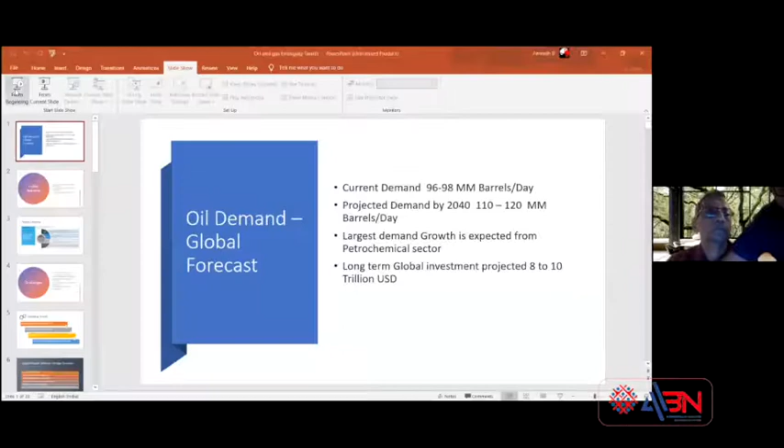Thank you very much for AABN for giving me this opportunity to share a few thoughts about the challenges faced by the oil and gas industry, how it is emerging, and what potential role it is going to open up for engineering, procurement services, construction, and operational and maintenance services, particularly for Indian entrepreneurs and business. I also thank people who have taken time from their busy schedule to be present in this event, to listen to some of my thoughts.

I also feel very humbled by the presence of people like Mr. Navneet, Mr. Nagarajan, who are all my senior colleagues, and we work together. I also feel this topic will be of great importance, not only to entrepreneurs, but also to our learned academic faculties of our university, who are shaping up our future engineers. However hard we try to do business, the sustainability depends on the chain of talent that is going to come from the university.

Having said that, many of my oil and gas colleagues who are present here, maybe some of the points I talk about may already be known to them, or in fact, they are more knowledgeable than what I am in that field. But this is purely my perception of how this industry is going to emerge.

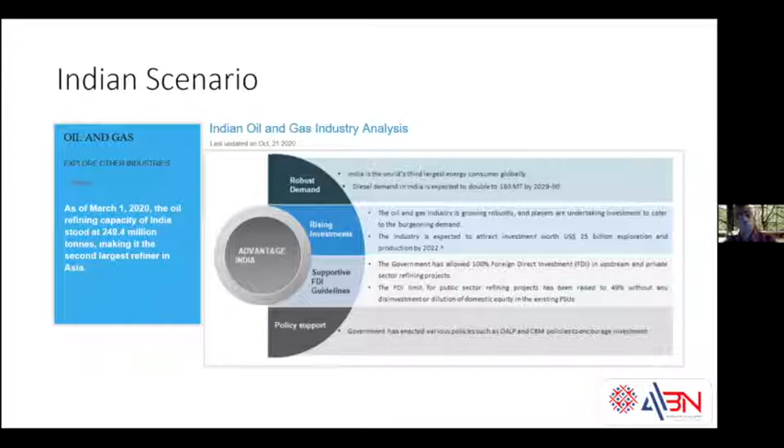Having said this, what are all the challenges faced by this oil and gas industry on the ground level? As Gopi has set the context, this reduced oil price is going to stay for long. Probably it may not even reach more than $100 per barrel again.

With this reduced oil price scenario, pressure on margins in the industry is increasing, forcing companies to optimize their expenditure and cost by way of operation, refurbishment, or new capital investment, whatever we call it. There is a huge pressure on margin and ways and means to make this operation more profitable.

On the other hand, environmental laws and compliances are becoming very stringent and more visible to the public. This involves not only a compliance issue but also a reputation issue. If a major accident occurs in an oil and gas facility, it not only involves financial losses, but also reputational losses, and the consequences are very huge.

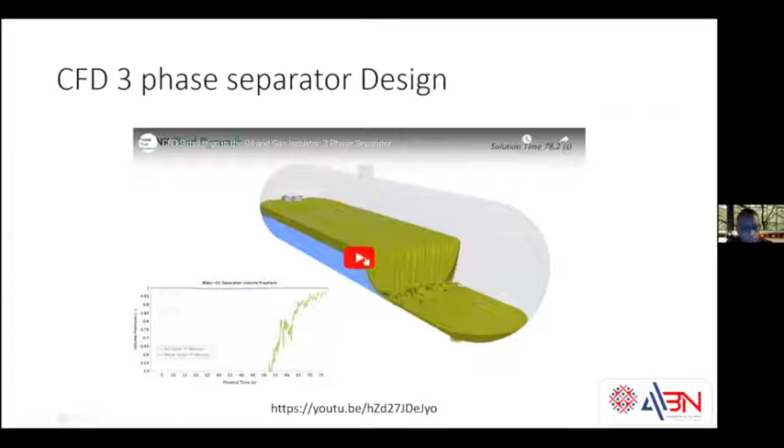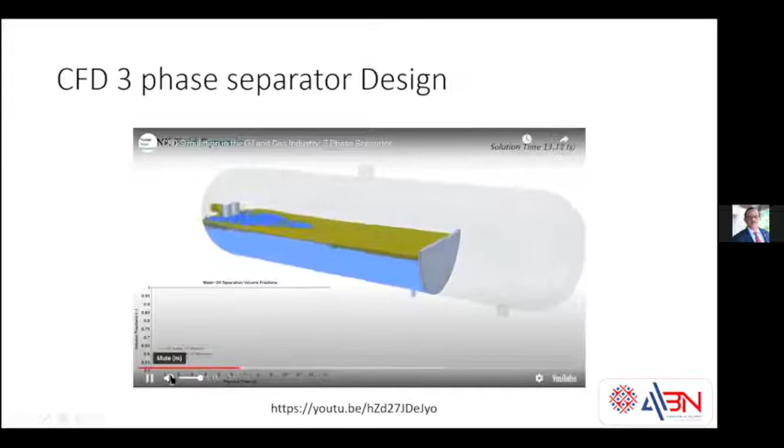Sir, I think the sound is not coming in the video. No, in this video there is no sound. Fair enough, sir. Perfect.

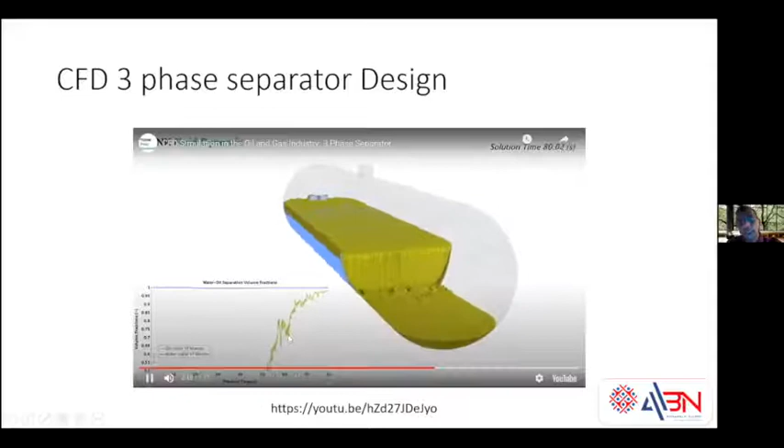This vessel is separating gas, water, and oil. It's a simple vessel, but CFD predicts how this flow is distributed inside and how it behaves. This can be simulated for various cases, and this powerful tool optimizes the separator and also predicts how it will behave under different conditions.

This is just an example of CFD. It is used in much more complex designs as well.

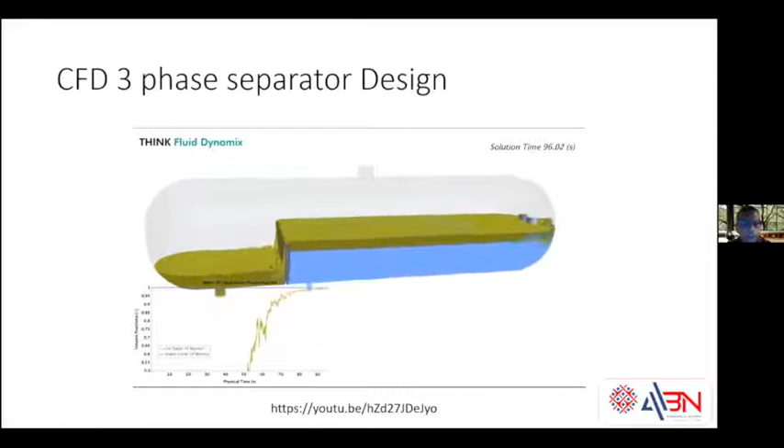This is another example of CFD, a lengthy video, but it shows how mechanical components going into the building of a refinery or petrochemical plant are designed using powerful computing tools, with a lot of algorithms and iterative calculations, leveraged without having to simulate or prepare a prototype to test it.

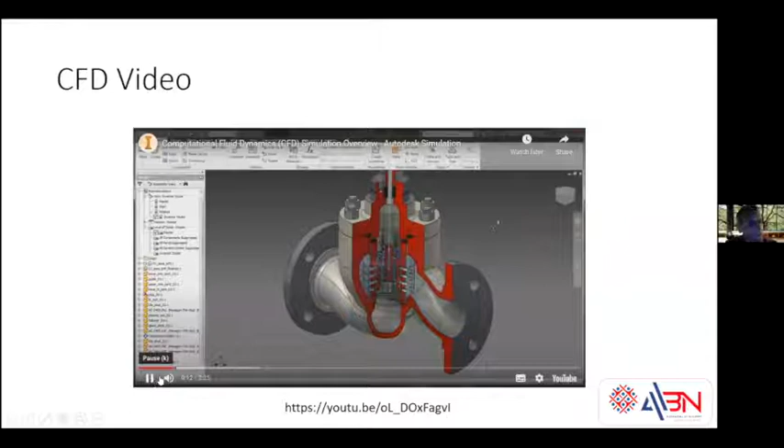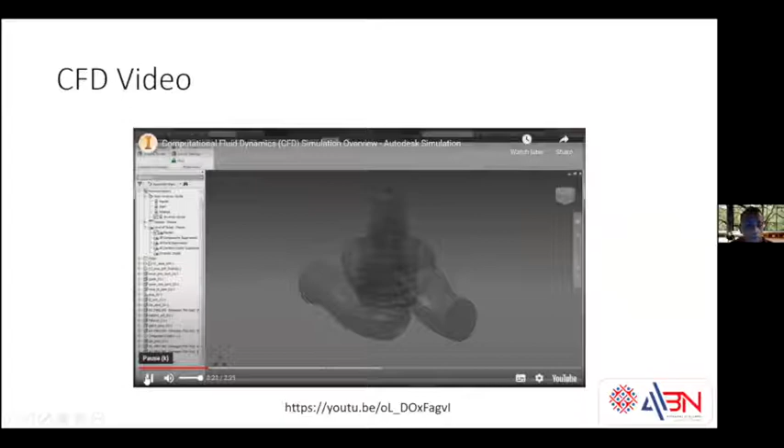Autodesk simulation software, part of the Autodesk solution for digital prototyping, provides a range of mechanical simulation tools to help designers, engineers, and analysts make decisions earlier in the engineering design process. With these tools, you can predict the real-world performance of your product, helping to save the time and money required to build multiple physical prototypes. Autodesk simulation software lets you start with mainstream tools and then expand your toolkit.

Having completed the design, all this designed plant has to be engineered. Engineered means you have to do equipment design, piping design, structure, and foundation to make it reality.

These days, more and more engineering operations are completely integrated. What I mean by completely integrated is working on data-centric tools rather than document-centric tools. It can integrate right from design up to construction on a common platform.

It allows simultaneous working of various teams. Maybe in the same platform, in the same model, a civil team works, a piping team works, an instrumentation electrical team works. Also, these tools can be shared across the globe, and people can work on the same tool. This allows people within one team of various disciplines also to work together.

It also enables construction, procurement, and other centers wherever the refinery is located. Maybe engineering is done in India, the plant is located in America, the owner is located in Saudi. We can all work on the same platform. What it brings to the table is it...

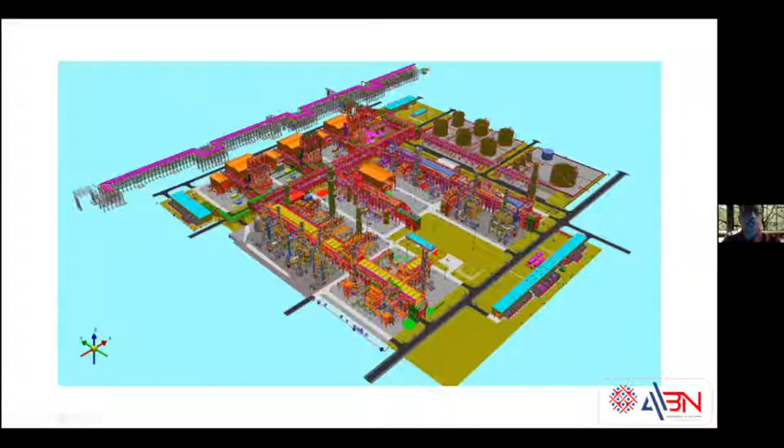This is a snapshot of a petrochemical facility. This is a real-time model, though it is dumped here. It is all created by an engineering software and an engineering team. You can imagine how many pipes, how many equipment, this complex design. So many people are working in parallel in this tool, in this platform.

It can detect clashes. It can directly talk to procurement tools. It can go to the construction, and which spool is constructed can be fed back into the model. Certain constructed or closed engineering positions can be locked; those lines cannot be touched. It is a very intelligent tool.

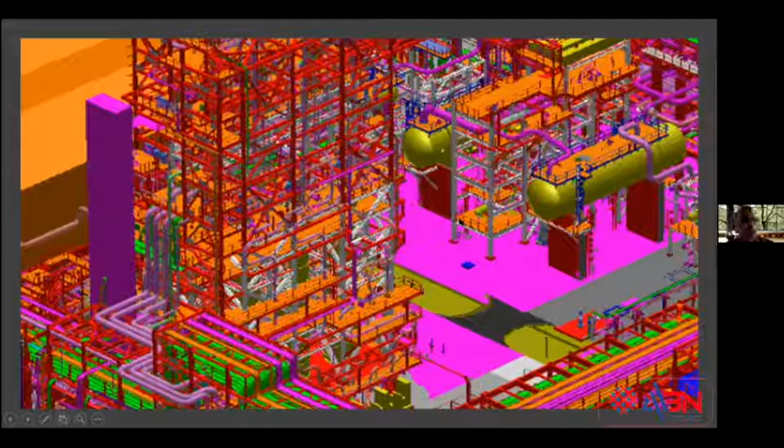Previously, in the previous generation of this process, we used to create this calculation model and manually transfer it to the engineering model. Now this model can directly talk to the engineering model. Thereby, any changes here can reflect there, and any changes made in the 3D modeling due to different routing or different engineering positions can reflect here.

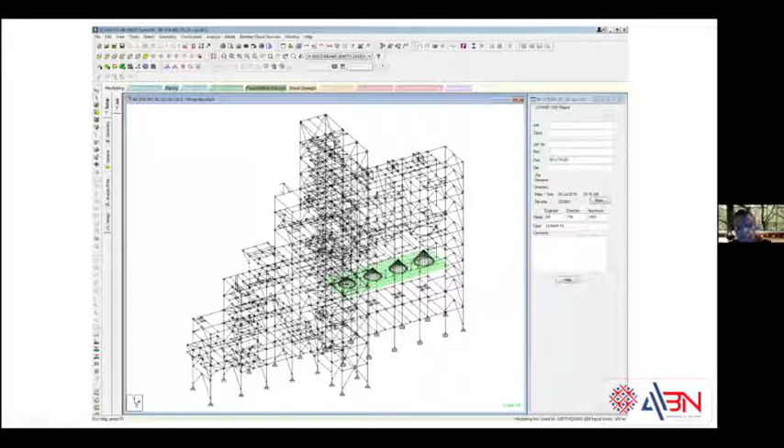So in short, what I am trying to tell is this is a powerful tool which enables a complete solution from design up to construction. Thereby, you are going with powerful analytics and tools to make it more robust, more optimized, more cost efficient, more productive, and it can also work across the globe.

This is another small video which I would skip. It says if it is a greenfield project, it is very easy; I can start everything from scratch. But if I have to work on a refurbishment or modernization of an existing refinery or petrochemical plant located elsewhere in the globe, with engineering done somewhere else, how do I get the exact data of those plants' prevailing physical conditions?

Previously, in the previous era, we used to send someone to take measurements, send it back, and then somebody has to create this model. Nowadays, there is a powerful tool that has emerged in recent years, called 3D laser scanning.

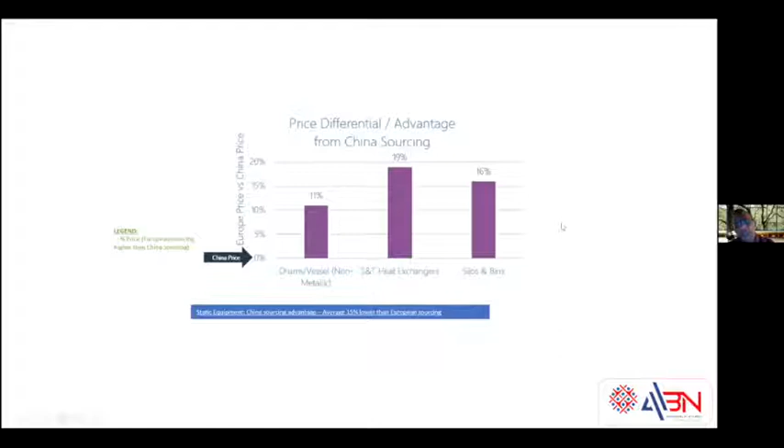Because of margin pressures and to sustain, the project delivery companies as well as the owners started looking for a low-cost source from elsewhere. I will show you how the spread of this is done across the globe. But there are countries which can competitively supply the same material when compared to sourcing from US, UK or Europe. So the low-cost sourcing, generally China is the leader in this. Most of our China supply is around 15 to 20% cheaper on a like-to-like basis compared to Europe, that too particularly for drums, vessels, exchangers, silos, and things like that.

When compared to rest of Asia, the rest of Asia is costlier by roughly 20% than the China price. Why this is so, what needs to be corrected, is to be seen. But this is raw data which says like this. Rest of Asia and other low-cost sources I am meaning Taiwan, Thailand, India, Romania, and places like that. These are all emerging, provided if you are able to do something to diminish this difference.

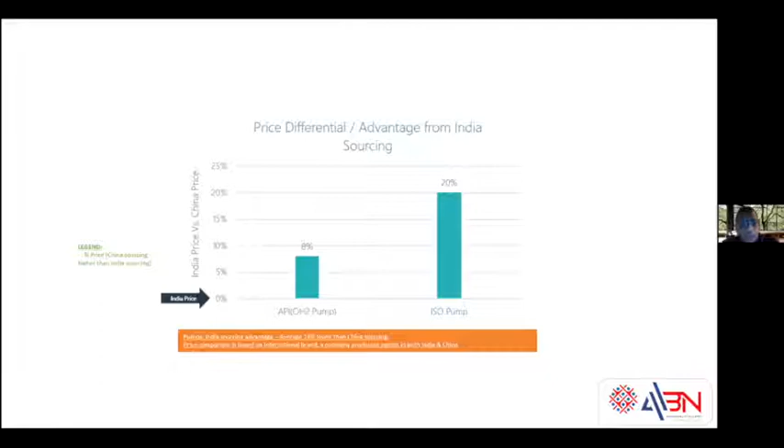When compared to static, India is having a price advantage when it comes to rotating machineries, say like pumps, compressors. China price in some cases varies from 8 to 20% costlier. That means somehow we are able to supply rotating machinery at a competitive price when compared to static.

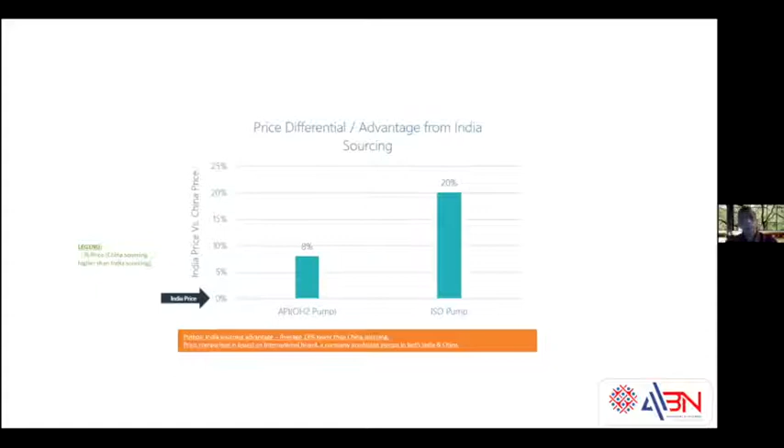Another aspect of the supply is supply chain services. That means I need an office and a team of people who ensure these are procured, inspected, delivered to the project globally. India is slowly emerging as a supply chain services hub. That means not material sourced from India, but Indian engineers and expeditors and buyers are located in India who can do the sourcing for a particular project or company all over the world. So services is a little mature, but still it is evolving. This is also another great potential. Like in IT sector, most bank back office operations are centralized in India. This global procurement is also in future going to be centralized in India.

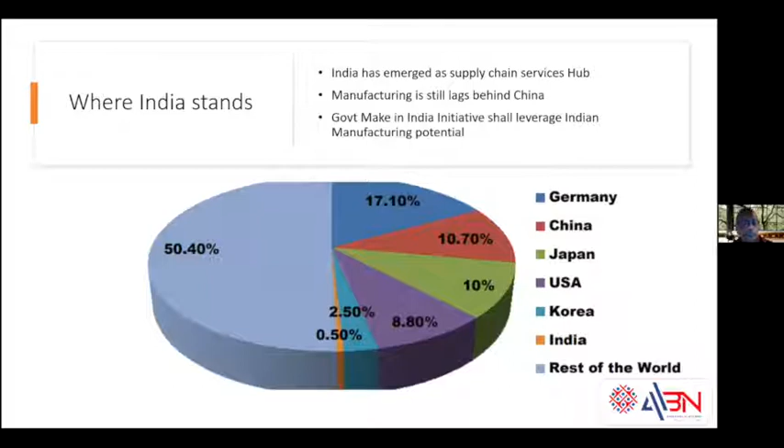Apart from material supply, which has got a huge potential in oil and gas industry, then I will touch upon the C portion of it. C portion is mainly construction, which is a little slow in adopting technology. That is what I also used to feel.

Now, because of labor shortage and construction errors, more technology and digitization is being applied in construction. For example, if you want to fabricate a pipe, a refinery will normally have around 20 to 30,000 kilometers of cable and 2,000 to 3,000 kilometers of piping. To track this material and install it correctly is a great job. Previously we used to do it manually. Now all the piping spools have RFID tags, so they can be easily scanned, identified, correctly installed, and fed back to the model.

And because of labor shortage, more and more prefabrication is also emerging.

Another latest technology in construction is 3D printing. Many of you might have heard of it. 3D printing is a technology which builds anything layer by layer directly from the model. Previously it was being done for smaller objects, but now the time has come and it is emerging.

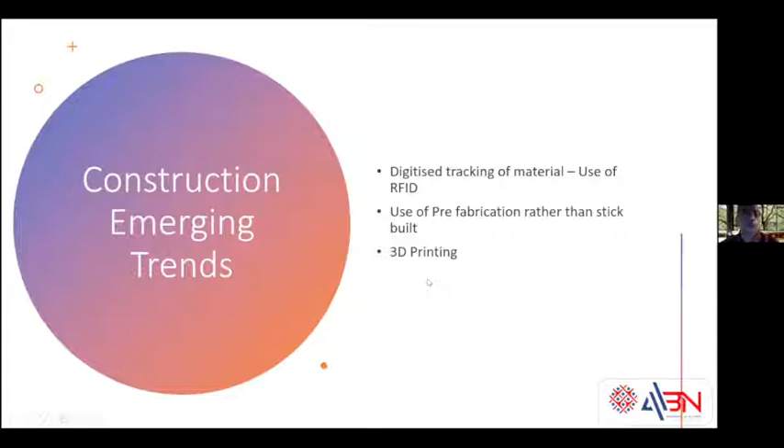Still, there are some issues with 3D printing with respect to larger construction in oil and gas, because the codal requirements are still emerging. It is not being recognized yet. There are certain gaps to align with respect to codes when we use 3D printing, which is emerging.

People have started working on this. I will show you a small 3D printing video, which is real. This is a real building somewhere in the USA.

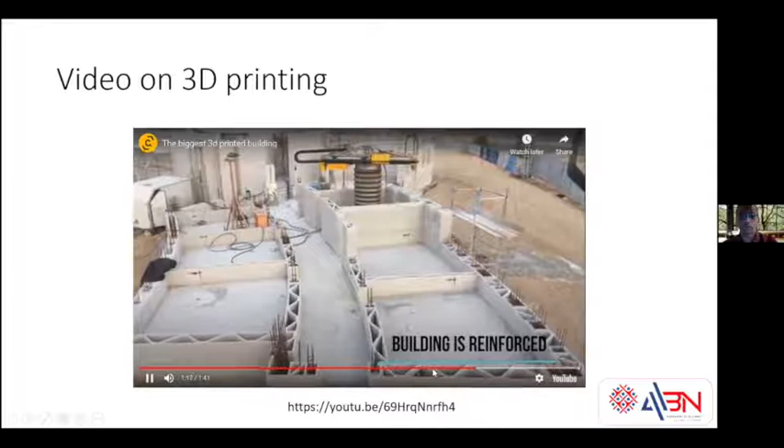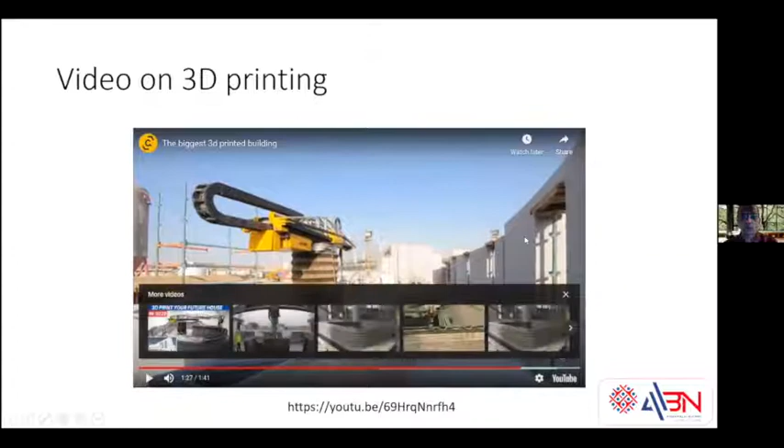You can see it is having reinforcement also. So this technology is going to be the order of the day in the future.

Considering this, in the construction industry where we are, only 2 or 3 construction companies are in the international arena from India. There are a handful of small-time constructors in Indian projects. They are a little slow in adopting technology, but these are all going to change.

Coming to the operation side of it, how digitally enabled operation is being done in the oil and gas industry to minimize human errors, human intervention, improve safety, and increase certainty. I will not speak much on this. I will share some videos which will show you in real life what is going on in this industry, and this is the future.

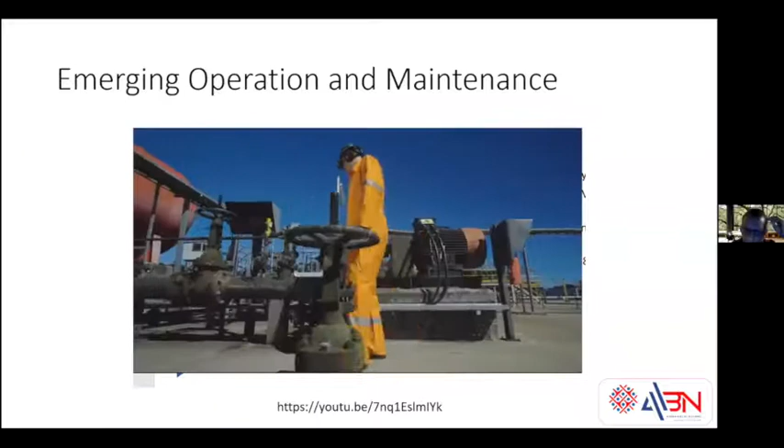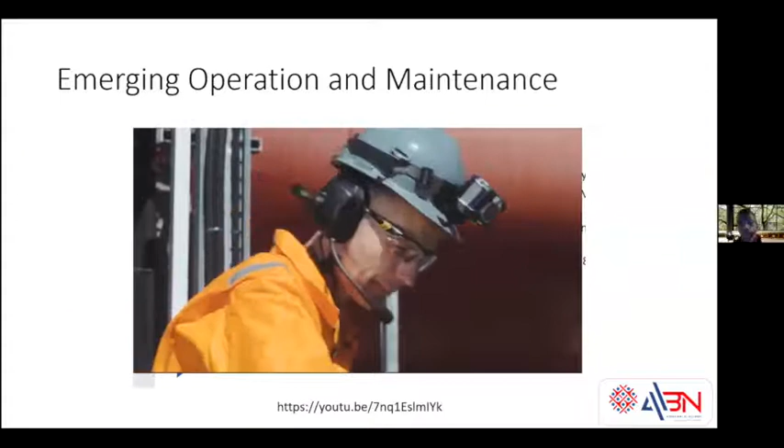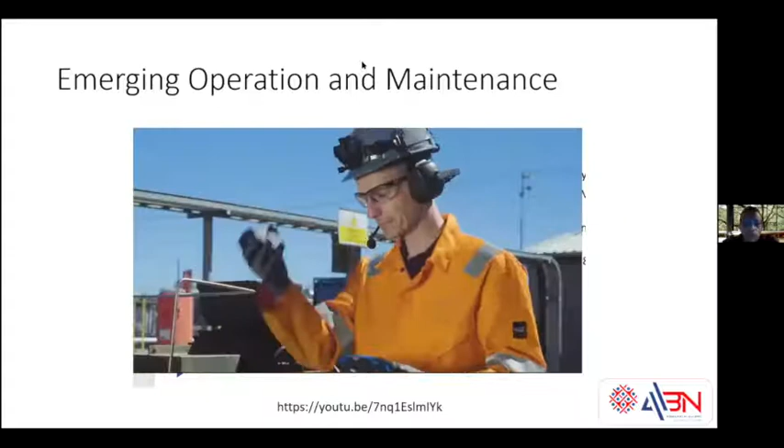Digital transformation is changing the industrial landscape. Enterprises require connected solutions for rapid response, cost reduction, improved preventative maintenance, and increased uptime. In this scenario, a rig worker, Kyle, is about to complete his first inspection on a recently installed pipe fitter and gauge. With his zone-rated device, Kyle initiates his work instructions by scanning the asset barcode. Once Kyle completes the first part of the inspection, he is instructed to connect the OnSight Cube to his phone and call Taylor, the off-site senior engineer, to continue the pigging inspection.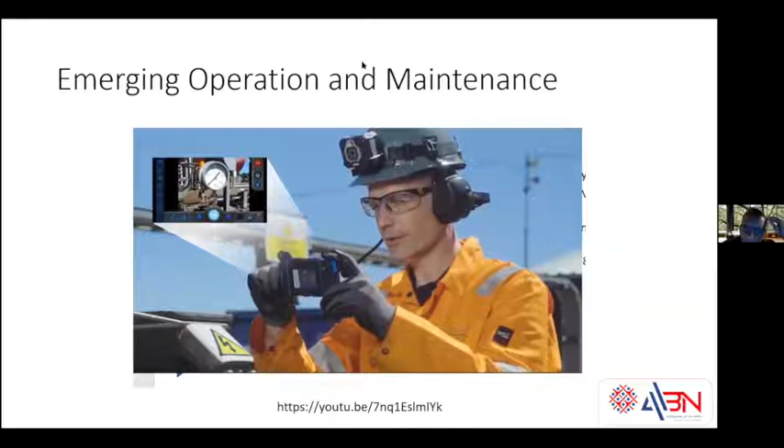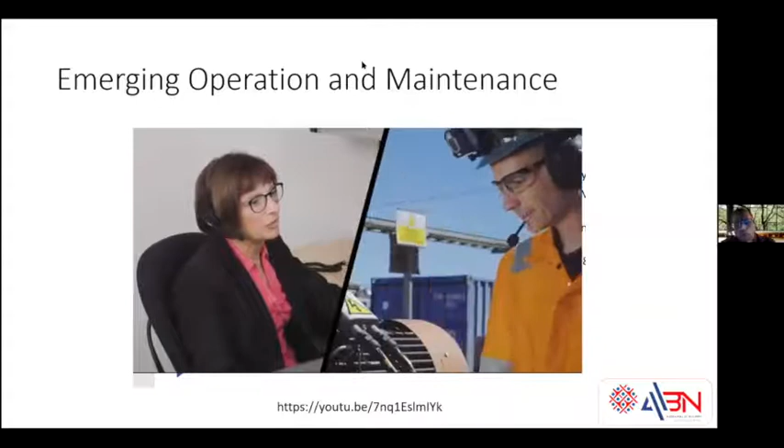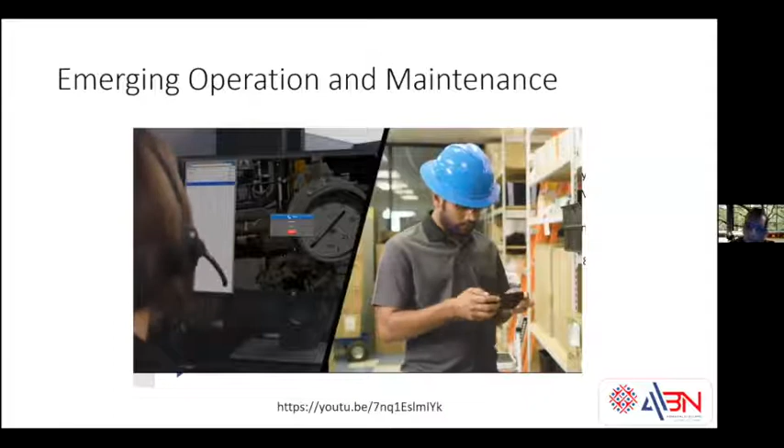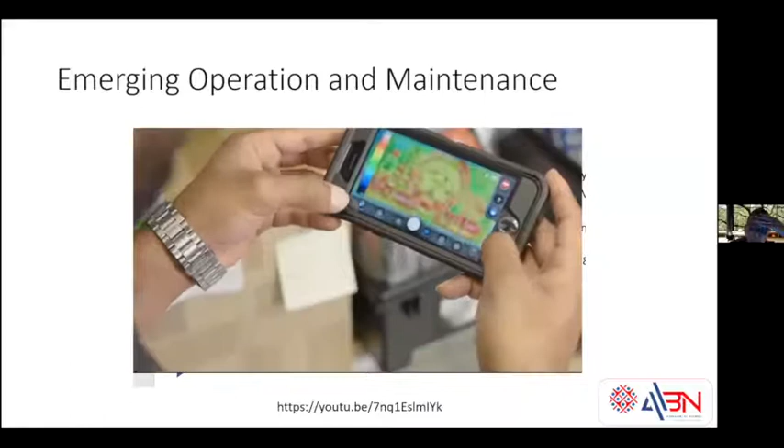Okay, thanks. You can see how connected this is, how the main engineering job is still remote and the vendor is somewhere else, but everything can be connected together by these digital wearables.

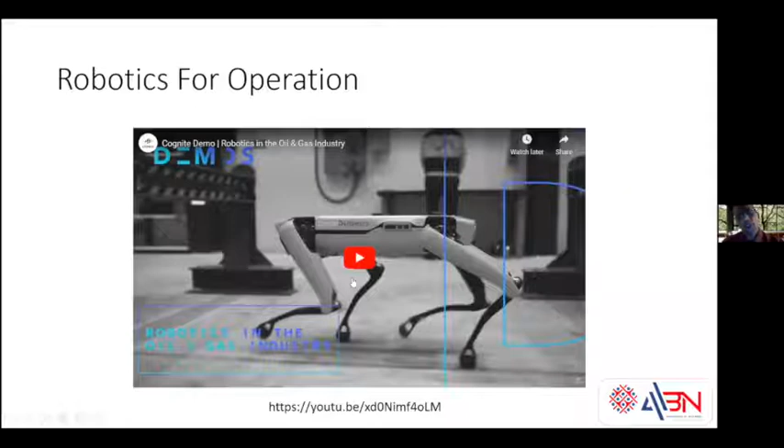Then in this video, I am going to show how robotics is being leveraged. Not very heavily, this is highly emerging, but this is going to be the future.

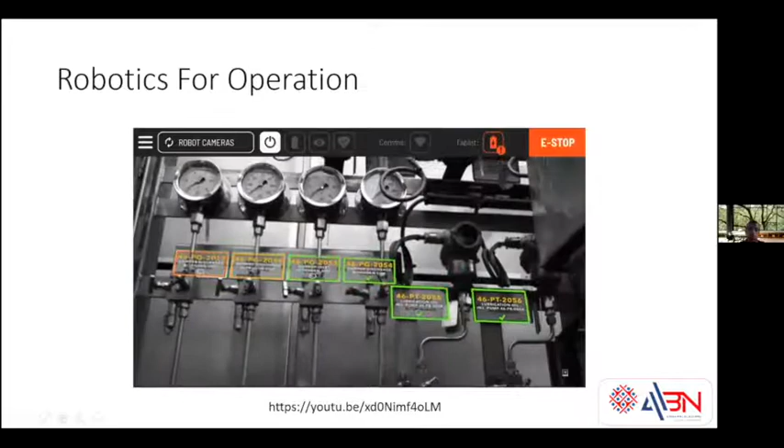You see how the robots go into hazardous areas and in real time check the information, including abnormal sounds, which can be transmitted back to the control room or to the engineering office elsewhere, or to technical service, or to the vendor, so that corrective actions can be taken at the appropriate time and a lot of downtime is minimized. Also, we are not exposing people to a hazardous environment.

Then another thing that is emerging in oil and gas operation and construction is the use of drones, mainly for inspection purposes.

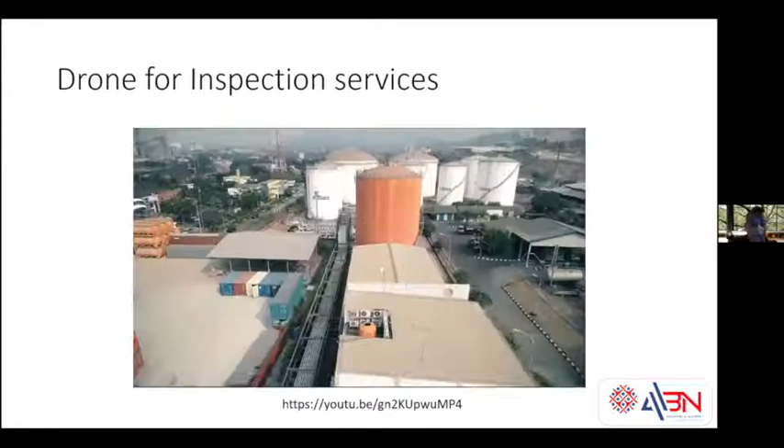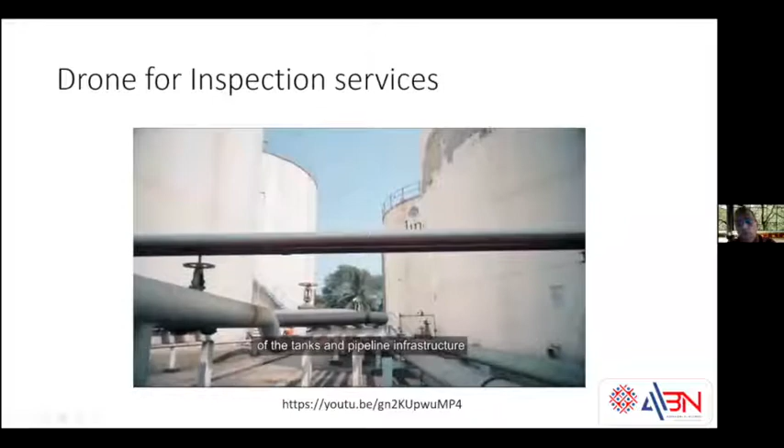My name is Eli Moselle with Halo Robotics, and we're here at Link Terminal, a tank facility for downstream oil and gas with over 20 tanks, executing drone operations to support maintenance and asset integrity management of the tanks and pipeline infrastructure. Halo Robotics is the Indonesia partner of many global leaders in commercial drone technology, including Emesent, DJI Enterprise, and Flyability, which are making the powerful drone solutions we are using today.

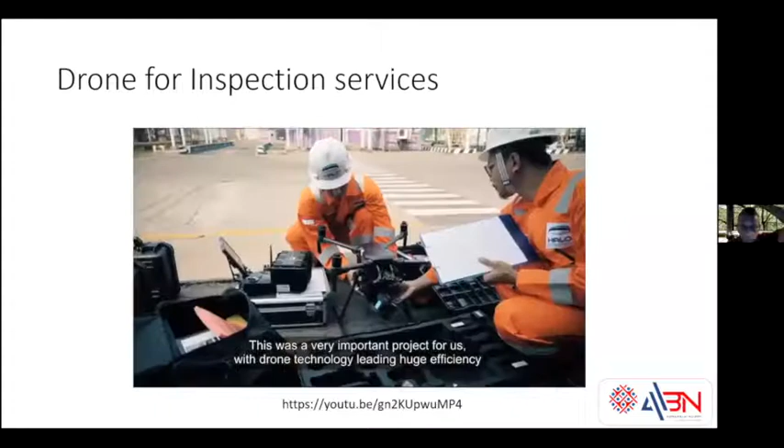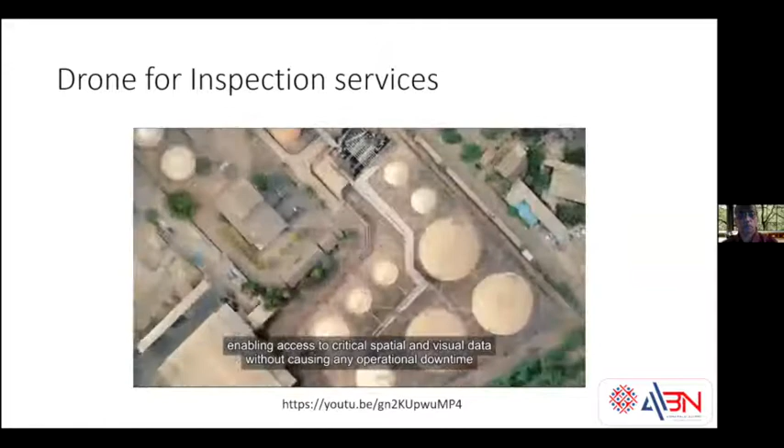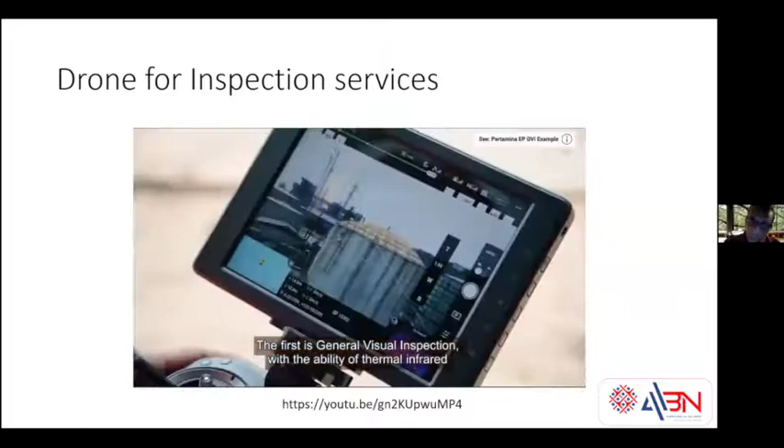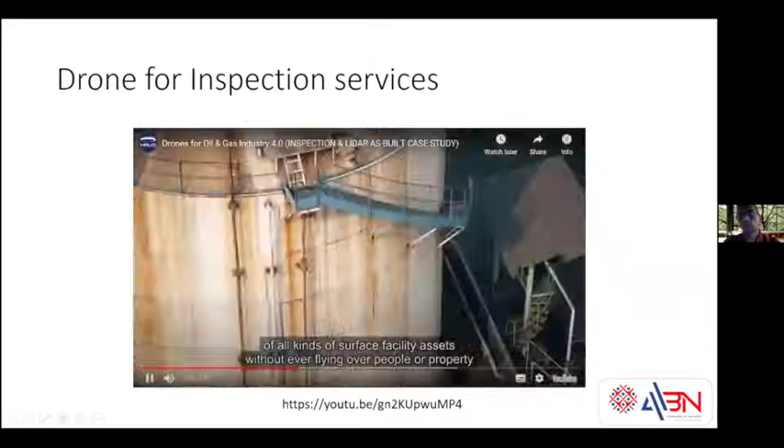This project demonstrated several very powerful commercial drone technologies for oil and gas and heavy industries. The first is general visual inspection, which allows us to fly over the assets, collecting high-resolution thermal and long-range zoom camera data in order to conduct a safe and systematic inspection of all kinds of surface facility assets without ever flying over people or property.

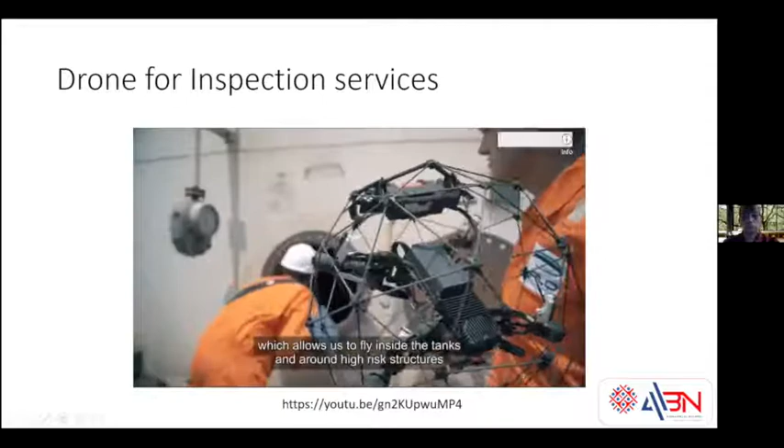The second major application is confined space or close visual inspection, which allows us to fly inside the tanks and around high-risk structures at a very close proximity without potentially even requiring manned entry into the tanks.

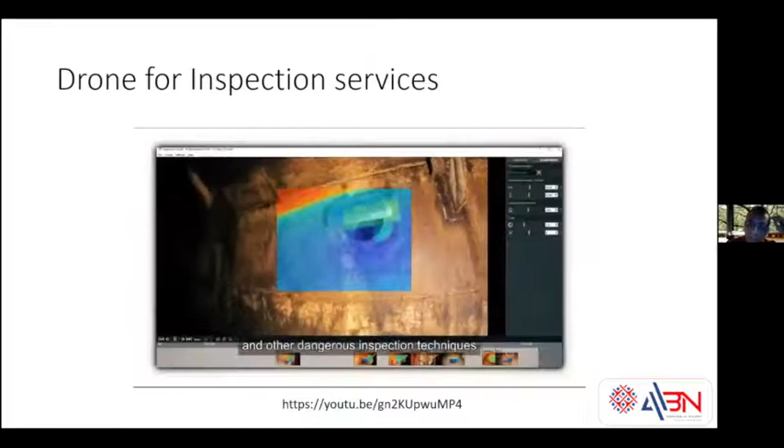A third thing that is very unique is LiDAR scanning to make an accurate 3D reconstruction.

Another thing that is very interesting and emerging is what we call in our parlance immersive technologies, using virtual reality and augmented reality. This can be built into a wearable like a helmet, and you can really see things like what we see in real life. This is real. Some companies are already leveraging it for training purposes, also for operation of the plant.

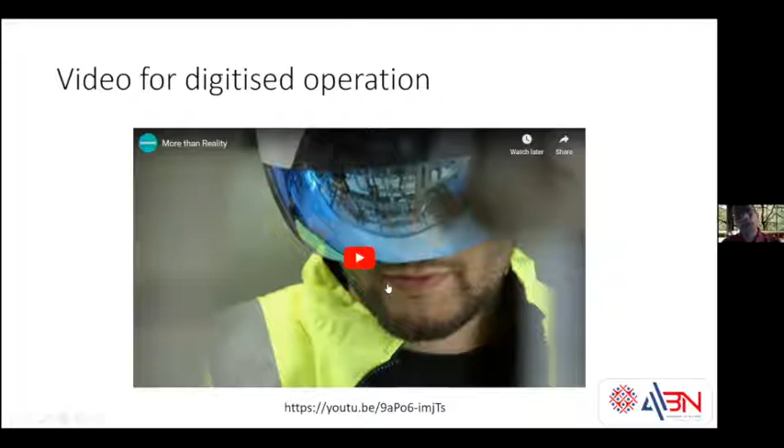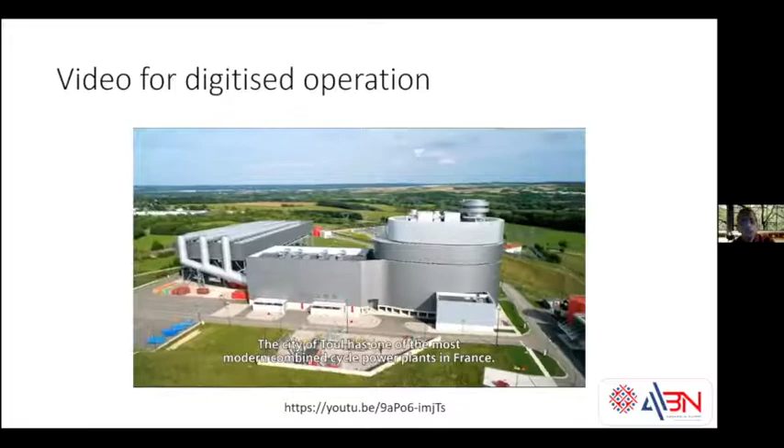The city of Toul has one of the most modern combined cycle power plants in France. Direct Energie has not only commissioned Siemens to build this plant, but also to operate it under an operation and maintenance contract.

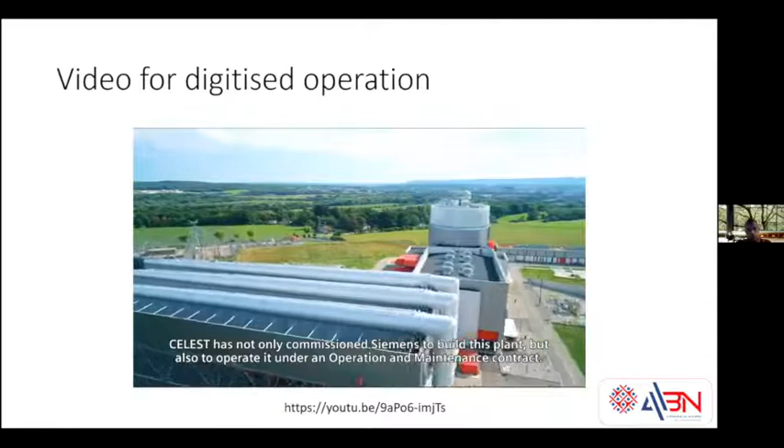There's a will in any plant operated by Siemens Service to provide the best efficiency. So we are operating the plant of Toul as if it were our own.

What if we have a completely digital chain from collecting data, evaluating data, and having post-processing of data? My opinion is that augmented reality can help to achieve this. That's my vision.

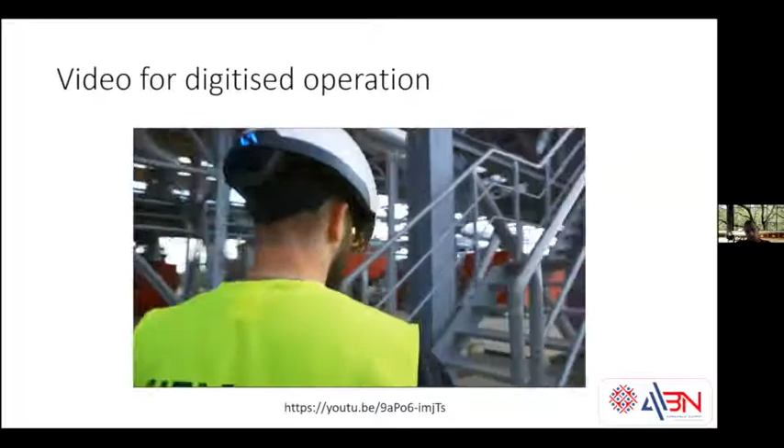Siemens uses professional-grade augmented reality as a versatile tool for the digitalization of power plant services, during operation as well as for staff training.

The DAQRI helmet, I think, is going to be a great component for our training for the Operating and Maintenance Centre. It's going to expand our portfolio and be able to train on-site. So you've got operators training locally via the augmented training.

It's a very amazing experience. And, well, actually, it's very simple to use.

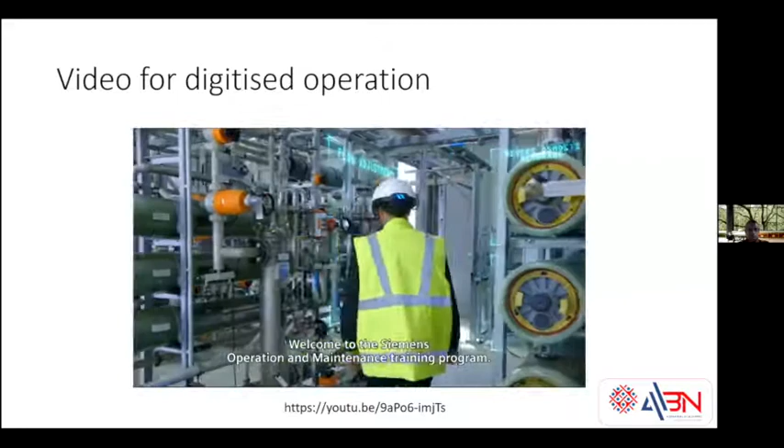Welcome to the Siemens Operating and Maintenance Training Program. You're ready to start your first training session.

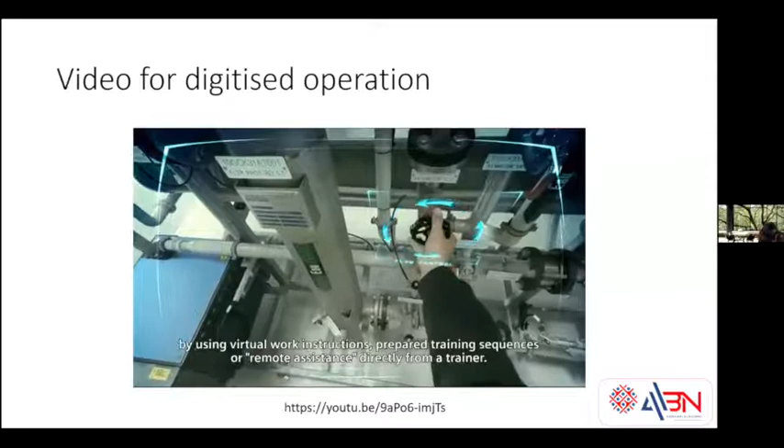Trainees can familiarize themselves with the processes in the power plant step by step, by using virtual work instructions, prepared training sequences, or remote assistance directly from a trainer.

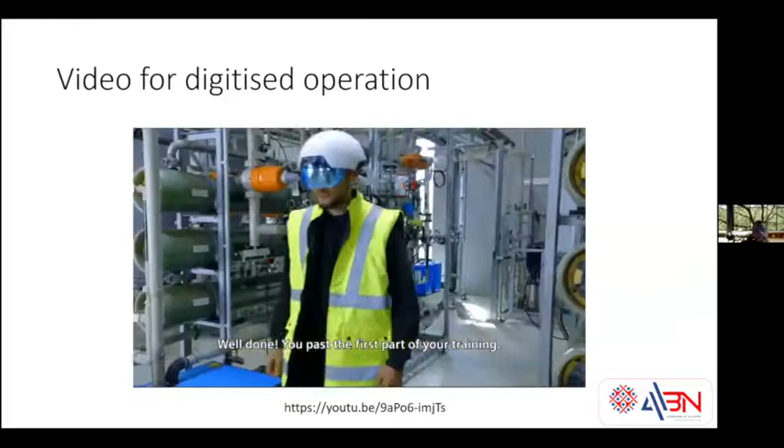Well done, you passed the first part of your training. Well, it was like a new world full of technology and innovation, a new way of life.

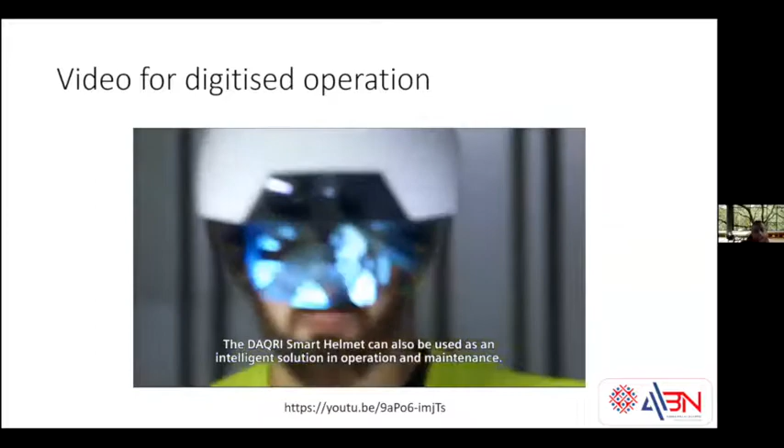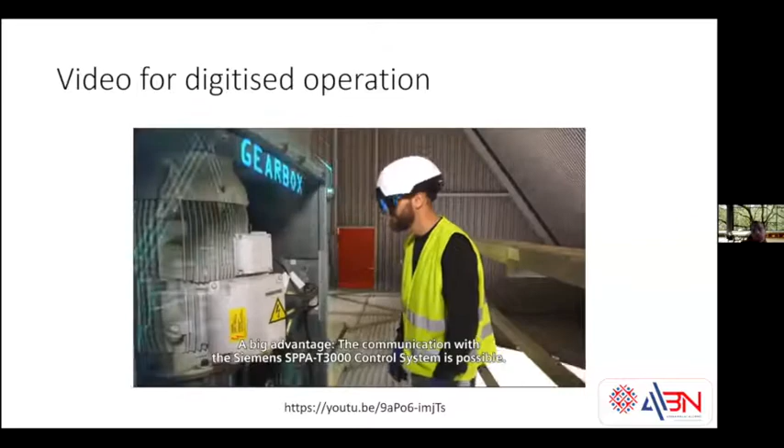The DAQRI Smart Helmet can also be used as an intelligent solution in operation and maintenance. A big advantage is that communication with the Siemens SPPA-T3000 control system is possible, therefore allowing digital measurement and operating data to be immediately available wherever they are needed.

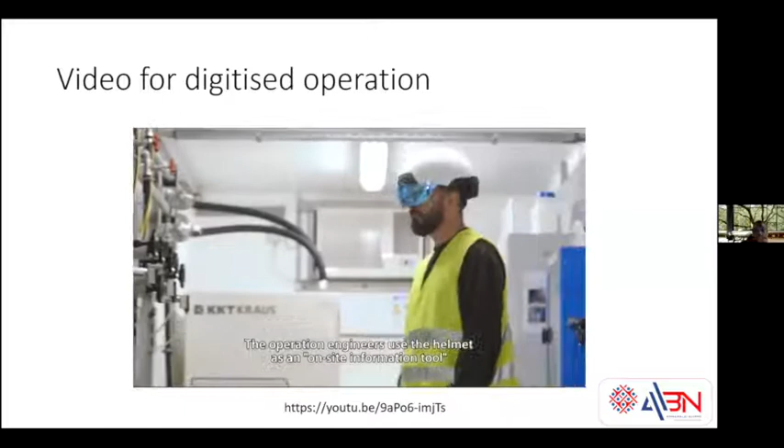The operation engineers use the helmet as an on-site information tool and can communicate directly with colleagues in the control room via remote expert.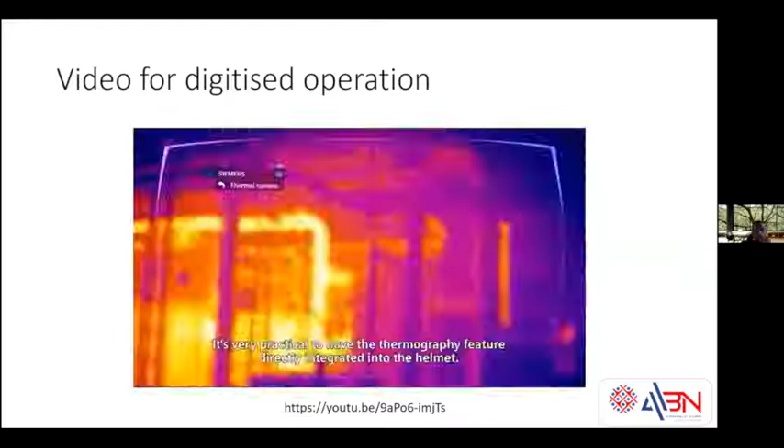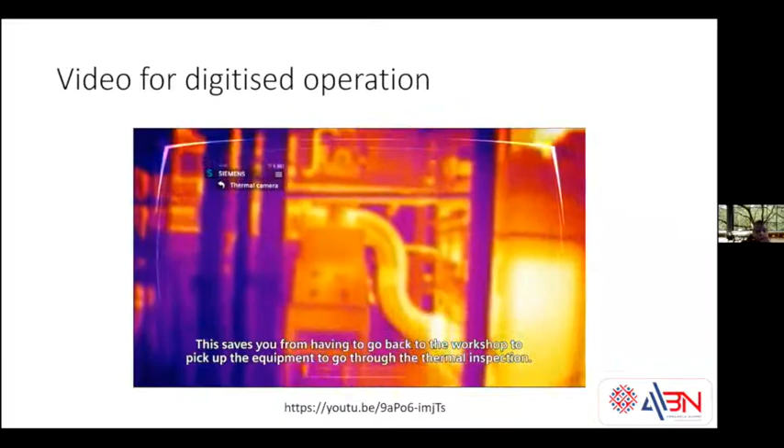Digitalization is not the future, it's the present. Siemens is driving digitalization on all levels, and this is the way things are emerging in oil and gas. Then finally, what is the potential for Indian business?

India has already emerged as an engineering hub, but that is going to change because more cost pressures are coming. With digitization and modern communication facilities, more smaller, high-end design engineering companies are going to emerge, and this will be integrated into the overall engineering by main aggregators.

The smaller high-end design engineering teams in India have not fully emerged. There are a handful, but most high-end designs are still done in Europe and USA. With connectivity and pressure on sustainability, more smaller teams will work distributed from India, not only from major cities, but possibly from two-tier cities and smaller towns, which will have higher connectivity and a better cost advantage.